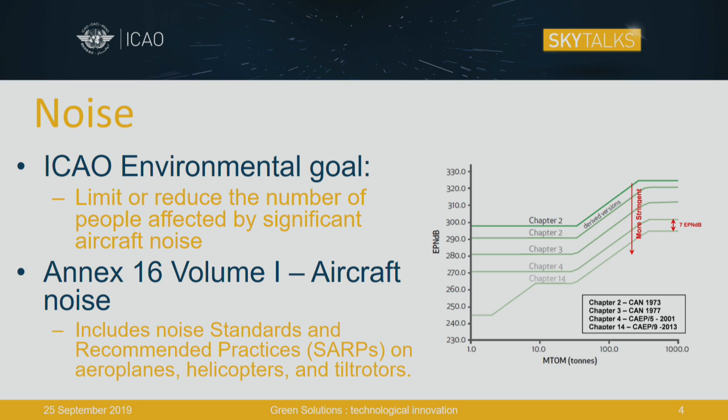So you can see that ICAO, through assessing technology and then making standards more stringent, encourages the latest technologies with regard to noise on board aircraft. But I don't really think you want to just hear about the standards. I think you want to also hear about how that actually happens.

And so in terms of noise reduction technologies, what I can tell you is that since the dawn of aviation, aircraft noise has been reduced significantly by something in the region of 75%, and this was done by a multitude of different technologies. Some of them that you see here in terms of modern innovations, whether it's improved geometry of the landing gear to reduce noise on landing, acoustical performance improved by liners in the engine, or engine technologies. All these add together to reduce the noise impact of the aircraft.

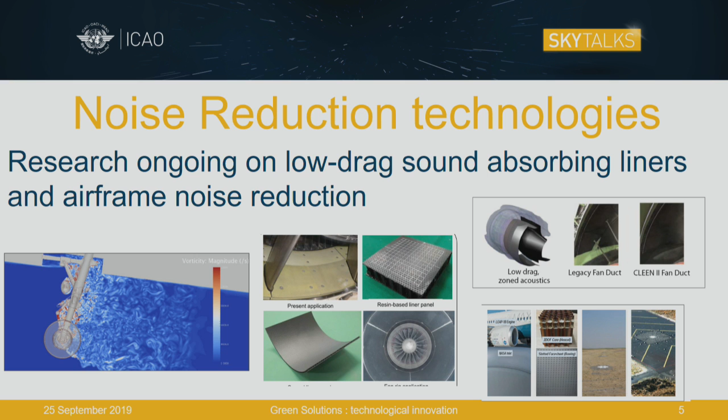What I would also highlight to you, of course, is that there is some interest in supersonic aircraft in the future. And what we understand is that we'll see a supersonic aircraft maybe entering service in a time frame around 2025. And ICAO is also carrying out work to understand and to also set standards and recommended practices to deal with the environmental impact of those future aircraft.

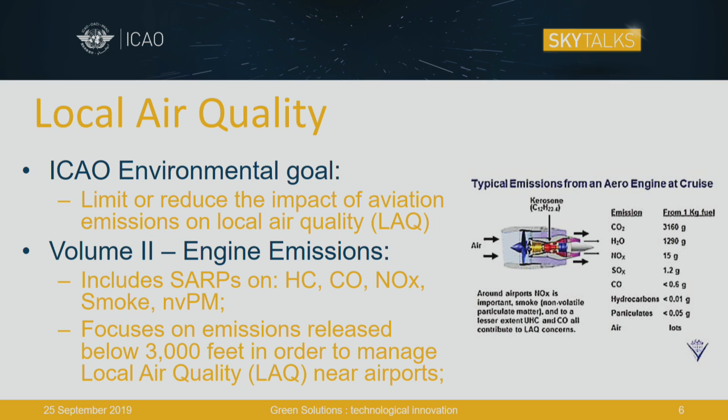So moving from noise to local air quality. Well, in exactly the same way as the technology standards set for aircraft on noise, we also have Volume 2 to Annex 16, which regulates aircraft engine emissions. These cover hydrocarbons, carbon monoxide, oxides of nitrogen, smoke, and non-volatile particulate matter. Broadly, what they do is set a standard that focuses on emissions released below 3,000 feet and those that impact local air quality.

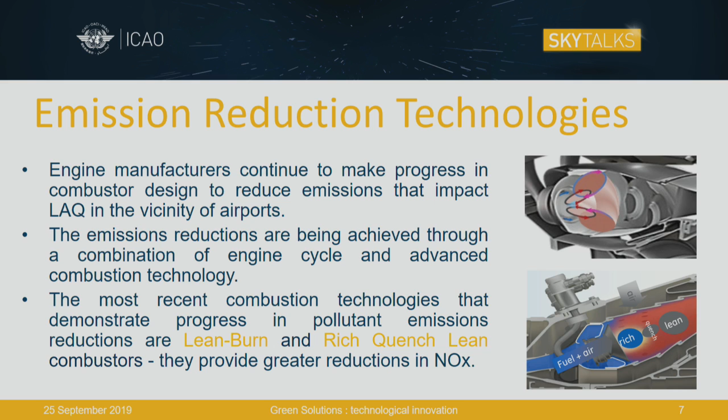And again, in terms of the emissions reduction technologies, the industry really continues to move forward to make progress on combustion design to reduce emissions that impact local air quality in the vicinity of airports. And these emission reductions are being achieved through a combination of engine cycle improvements and advanced combustion technology. And the most recent combustion technologies that demonstrate this progress are, for example, lean burn combustion technology and also rich quench lean. They provide significant reductions in oxides of nitrogen.

Now, we also consider interdependencies across all our standards. Of course, when we set standards, we also consider the impact of a noise standard on fuel burn, a fuel burn standard on local air quality. That's extremely important and something that we take very seriously here.

We also set brand new standards, and in fact, in early 2020, the ICAO Council will consider for adoption a brand new non-volatile particulate matter standard for mass and number that was recently developed by our Committee on Aviation and Environmental Protection. Now, while historically the international focus has been on oxides of nitrogen, this new standard really completes the suite of engine emissions standards.

And while we're talking about interdependencies and a multitude of ways of reducing the environmental impact, it's also quite interesting to note that sustainable aviation fuels can also reduce NVPM emissions significantly. And I'll come to sustainable aviation fuels a little bit later in this presentation. So I've told you about noise. I've told you about local air quality and the engine emissions that impact it. Now we'll talk about climate change.

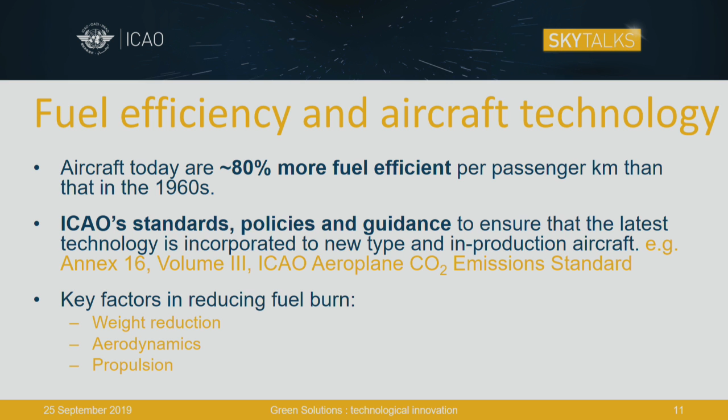So to build upon that, and the fuel efficiency and aircraft technology, aircraft today are 80% more fuel efficient than they were at the dawn of aviation in the 1960s. This is an incredible achievement, I'm sure you'll all agree.

And it's the ICAO standards, policies and recommended practices that have ensured that these latest technologies have been incorporated in aircraft design. And very recently we adopted our Annex 16 Volume 3. So I've told you about noise, Volume 1, Volume 2 on emissions. We also have Volume 3, called our ICAO Aeroplane CO2 emissions standard. That applies to brand new type aeroplanes from 2020 and then in-production type aeroplanes from 2023.

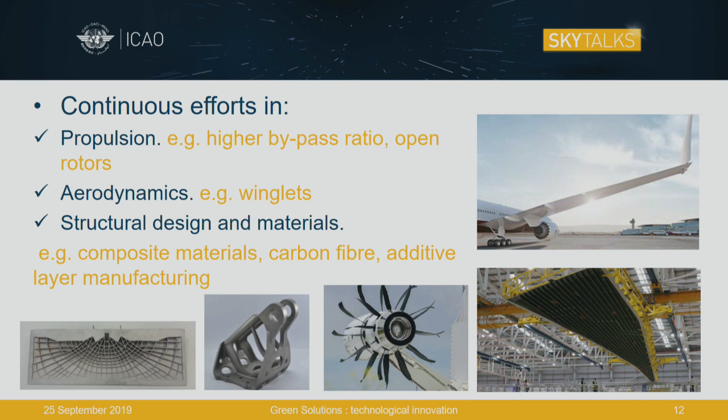And we've seen a large increase in the use of composite materials across the industry, whether it was composite wing or composite fuselage, most recently on the new type aircraft that we see operating today. And also some examples are shown here of 3D printing, which adds an efficiency to the manufacture of the aircraft, while also potentially reducing weight. So all those technologies are being used to really make strides and advances in aircraft technology.

So now I'm going to just push the boundaries, and I'm going to talk a bit more about electric and hybrid aircraft, and the electrification of the aviation system. Before I start, I just want to impress on you how exciting this area really is. And those of you that were at our innovation fair over the last couple of days prior to the assembly will have seen urban transport startup companies and large organizations coming here to show what they're doing. So it's a very exciting time to be in this sector.

When it comes to the bigger airplanes, the airplanes that you all traveled here today on, well, the challenges are somewhat more stark. So what I want to describe to you is an issue. Of course, there are ways of electrifying the aircraft. We can go for a hybrid type approach for the engine. There are some concepts where one engine could be electrified. These will reduce CO2 emissions, and that's of course very welcomed, and the reductions will be very important in the future. But electrifying a large aircraft has its challenges because of the energy density of current lithium-ion battery technologies.

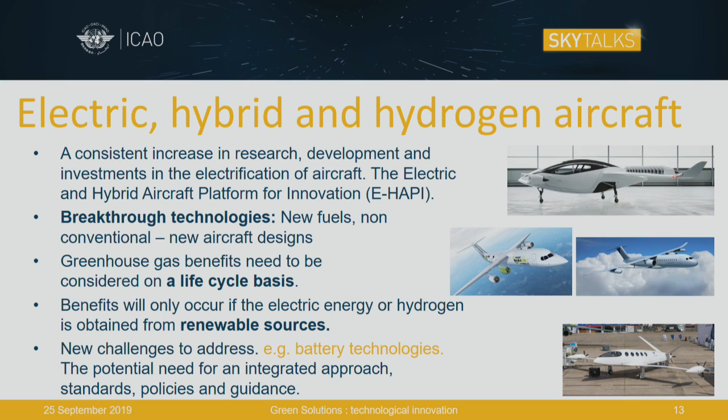But when we consider all of this, another important thing needs to be considered. We need to consider this on a full life cycle basis. So even if you electrify the aircraft, you also need to ensure that the energy used in your battery to propel your aircraft is also renewable.

So all these things together, as you can see, we really need to consider all these things in order to achieve our aspirational goals. The advances are moving forward. We really are making significant progress. And here in ICAO, we really monitor the industry moving forward. And for those of you that want to visit our website, we have a platform where we're trying to collate all these initiatives and efforts. It's called the Electric and Hybrid Aircraft Platform for Innovation, or EHAPI, and it contains all these initiatives and innovations.

So we also have significant work going on sustainable aviation fuels within the sector, and I just want to tell you what I mean by the phrase sustainable aviation fuel to start with. Well, first of all, it's a drop-in fuel, so it's chemically identical to the kerosene that we currently use, which means there's no changes to the aircraft and engine configuration. So it ensures compatibility with the current aircraft systems, delivery mechanisms, and of course, safety is primary, so it matches all the safety certifications.

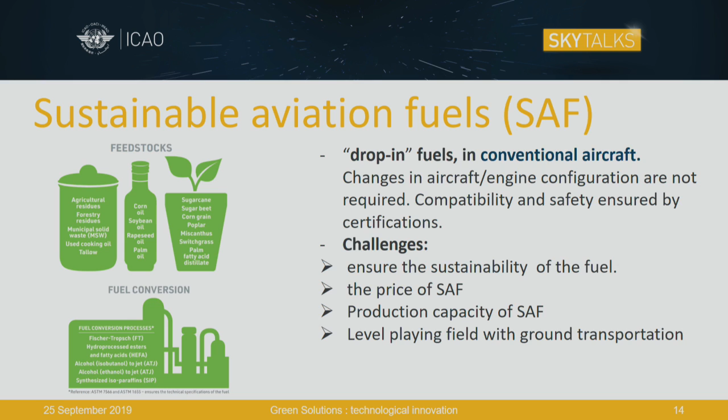Now, all this work is really progressing in the industry, and here in ICAO, we also have our 2050 vision for sustainable aviation fuel, which has told us, our member states have told us to carry out a stock taking process to understand where the industry is going, and there's plenty more details on our website. So these are really ways of reducing CO2 emissions on board the aircraft.

Now I just want to talk to you about some projects that we've worked on as ICAO, and that are being worked on by the international community in terms of airports. So there are many ways to reduce the CO2 footprint of the airport. In fact, I'm aware that there is a significant push to meet carbon neutrality by 2050 by a number of airports globally, and how they might do that. So there's the CO2 from the airport. There's also the CO2 used on the ground by the aircraft.

And those of you familiar with the industry will know that in the tail of the aircraft you have an auxiliary power unit. This burns jet fuel and produces CO2 emissions. If you switch that off, of course, you have an immediate benefit to the climate. So here in ICAO, we worked under the auspices of our ICAO European Union project, and we set up a pilot. What we wanted to do was to prove that you could build a solar panel array at an airport, electrify a gate, then when the aircraft pulls into the gate and the passengers disembark and then embark, instead of using an APU, it's plugged into the gate using renewable energy.